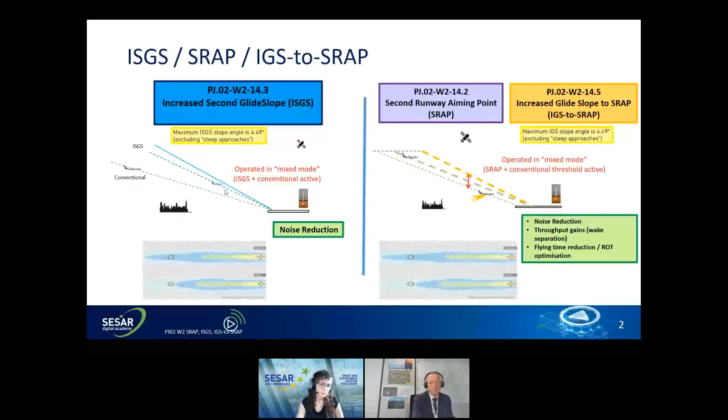And we could also combine the two, so the increased glide slope to the second runway aiming point. This is a third solution, which we call IGS to SRAP. The overall naming of these solutions is enhanced approach procedure. In fact, the work started earlier in SESAR, already in SESAR 1, through the EAP, enhanced approach procedure enabled by GBAS, and then further in SESAR 2020 in Wave 1, as well as continuation now in Wave 2.

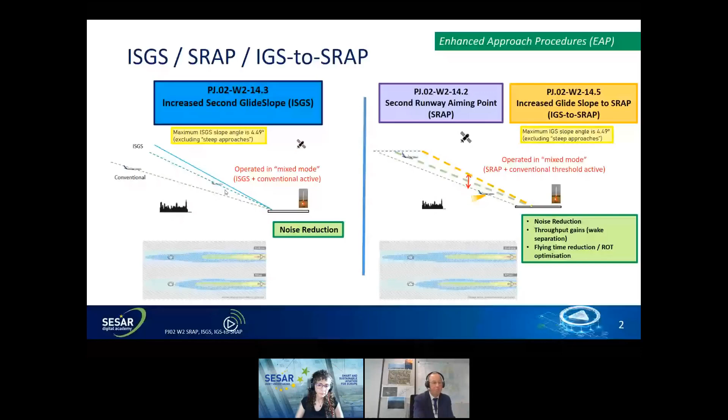So on the increased glide slope, second glide slope applicability, there is a key aspect to consider. If we have successive traffic flying on the steeper approach, in fact, we can apply standard separation even for wake turbulence. However, there is a situation where the number one traffic would be flying higher and number two on the conventional. And in that case, there can be a potential increased exposure, which would lead also, in some cases, depending on the combination of aircraft, to increased wake separation.

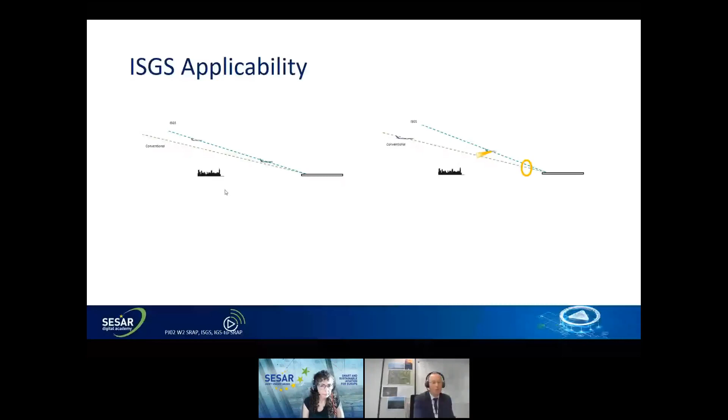Which means that, in this situation, the ISGS solution and operations are in fact compatible with limited traffic pressure, but we could also limit that impact through use of optimized wake turbulence separation schemes like RECAT. But that also means that overall, we expect this solution to be more applicable for lower traffic levels like off-peak or night situations, but it's also where we can expect the most constraint from the noise point of view.

If we look at the SRAP and IGS to SRAP, so with the double threshold, there is also a potential impact if number one traffic is above, but there is here as well a big benefit when we have smaller aircraft flying higher than larger aircraft, which would remain on conventional approach. And you can optimize the wake separation. It depends also on the distance between the two thresholds and the two aiming points, which also create the vertical distance between the glide slopes.

But there is a possibility, if we apply here in the example the wake RECAT scheme, to gain a further 1 or 2 miles in some cases, and even ultimately possible suspension of the additional wake separation. So the optimum working method here is to assign the smaller aircraft, medium and light, to the SRAP and to the upper glide. So here we can gain runway throughput benefits, arrival throughput.

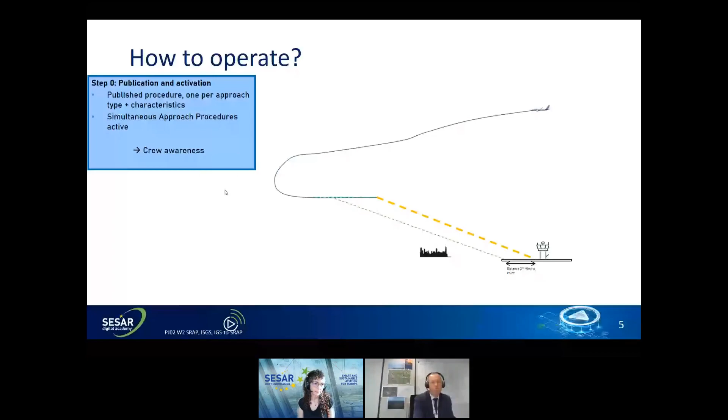And so, of course, the flight crew needs to be aware of the specific characteristics of the procedure, not only through the charts, but also through familiarization, through airport briefings, and possible simulation sessions. And then tactically, the approach procedures which are active would be mentioned and displayed by ATC, and the pilot can, from that, prepare and brief the most expected approach.

Then at initial contact with approach, they would be receiving the expected approach procedure, which can correspond to the approach they briefed, or otherwise they need to rebrief in case. And they can always reject if one of the procedures is not found suitable, given the specific conditions of the flight. There is a possibility to revert to conventional approach to a certain stage, but of course, this needs to be done early enough for the aircraft.

Your presentation has gone again, I think. That's strange because I can see it like before. So again, I'll try to. Reset, sorry. Can you see it now? Not yet. And actually, now we don't see you either. I don't know what happened. It's really strange. Okay, I'll do it again. I think there is indeed some jump.

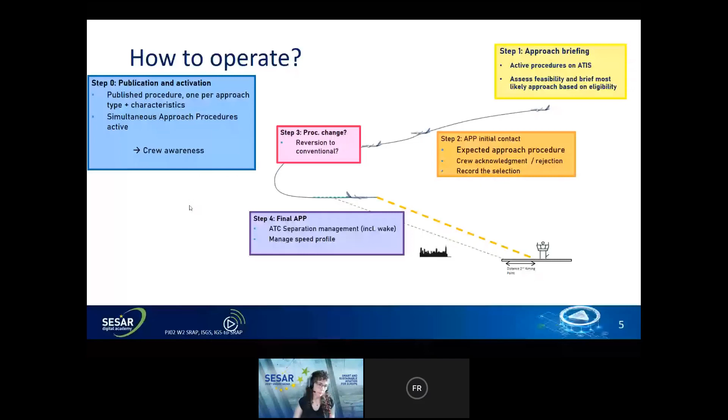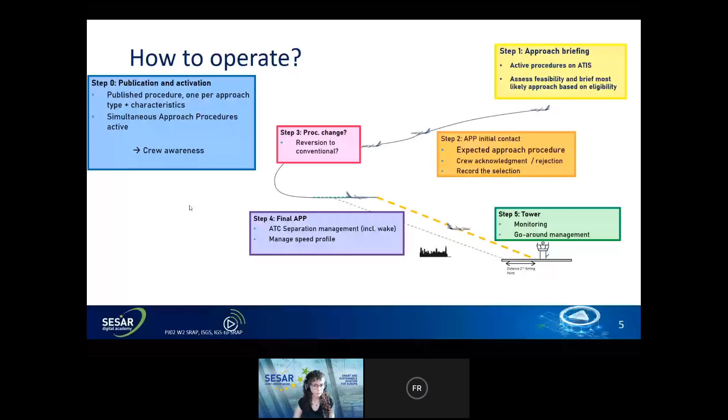Now it's back. Okay. So I was saying that there is possibility to revert to conventional approach at some stage, and eventually the final approach controller will manage the separation between the aircraft, also the speed profile aspect, because it may depend on the slope angle. And finally, the tower controller will ensure the monitoring of the traffic as they do, management of go-around, as well as specific reminder in the landing clearance about the intended threshold when applicable.

So to summarize, in terms of the key enablers, we have on the ATC operation side the need to be able to manage multiple active approach procedures, and there can be some HMI support for that. I will show examples, and the need to manage in particular the wake turbulence separation impact. On the airport infrastructure side, the adaptation of the visual aids, such as the slope indicator, the runway markings, or the approach lighting system. And on the flight operations aircraft side, it's published procedure. There is, of course, a key aspect on familiarization and the pilot cockpit assistance for possible increased slopes depending on the aircraft type. So let's have a look at the ATC side first.

Here is an illustration of adaptation of the controller HMI, which relies here on the use of another SESAR solution, which is time-based separation and optimum runway delivery tool, which provides the controller with spacing and separation indicators. And the flight labels of the traffic can be used to insert the assigned procedure such that the tool is aware of which profile and which separation applies.

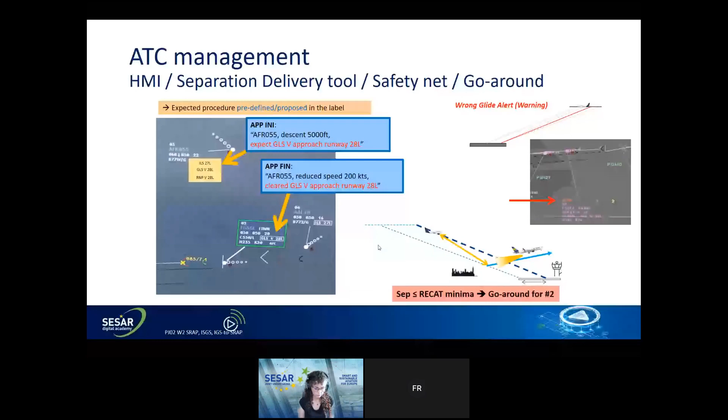There are also some specific safety nets that have been identified as necessary, because the reduction of wake separation relies on the fact that the aircraft will fly on different glide slopes and different vertical profiles, and in case there would be an interception of that profile, there is a need to warn the controller and to act directly. So there is what we call the wrong glide alert warning information. And on the go-around side, there is one specific situation where number one traffic flying on the lower glide would do a missed approach. Then we lose the criteria for reduction of wake separation, and so there is a need to manage go-around for the following traffic.

And so this has been evaluated through a series of real-time simulations with air traffic controllers. First in SESAR 2020 Wave 1, where there was an initial focus on the nominal case, on the controller HMI, and the use of this TBS ORD tool. And then in Wave 2, where we looked at non-nominal situations, such as the go-around, failure of the tool or the glide alert, and the way the controller can manage these situations, plus specific phraseology as I introduced before for the second threshold operation.

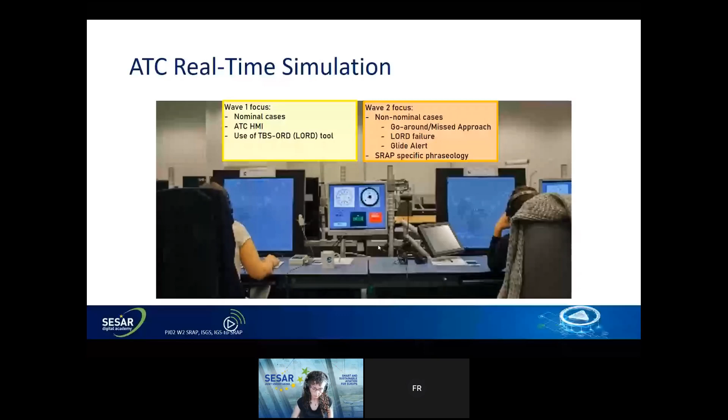So I now propose to have a look at what it will look like through our flight simulation campaign. We did a series of flight simulation campaigns with an Airbus 319 aircraft type with a qualified full flight simulator, and with type-rated pilots from airline operators. I now show you a first video which shows the approach with increased second glide slope, 3.5 degrees, with this 319 with the dual PAPI solution. And this is in day condition.

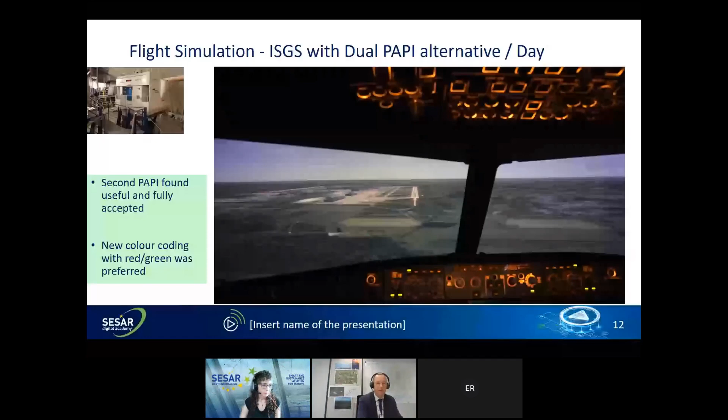Okay, so let's now look at basically the main conclusions from this. So from the pilot perspective, the second PAPI was found useful and accepted. And in fact, there was a slight preference for this new color coding with the red and the green for the second PAPI. So let's now go to the SRAP, second runway aiming point. First, let's look at the runway markings and how we can accommodate the second threshold aiming points and touchdown zone.

So in fact, there are two situations. Either we have the second threshold located more than 1,050 meters further. In that case, we can in fact duplicate the markings and avoid interference. So the first option was just to have a duplication of standard ICAO Annex 14 markings. Then we looked at a variant for the aiming point, which is using a checkered design. And in fact, this is inspired from what has been done at some airports, and it's still, I think, today the case in London City for the aiming point.

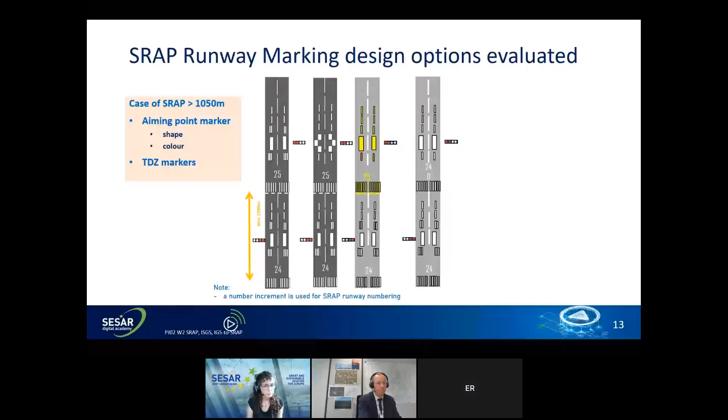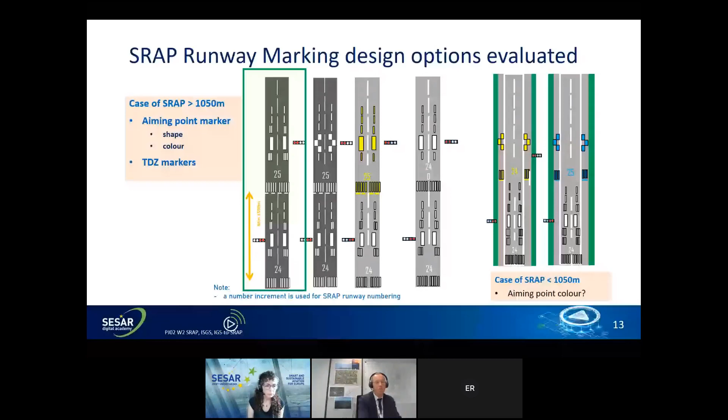We also looked at the possibility to use another color to increase the distinction, but however, this was also more challenging for the pilots, as I explained. And eventually, the possibility to use a letter for the second threshold instead of an increment. And also the case where we have less than 1,050 meters, using the side of the runway shoulders also with markings. So let's have a look at the next video, which is now looking back at the first option, which is the duplication of ICAO markings. And again, still the same airport environment.

400. Check. 300. 100 above. 200. Minimum. Continue. Check. 100. 50. 40. 30. 20. Retard. Retard. Retard. Spoilers. Reverse green. Checked.

Okay, so that was to assess the runway markings when landing on the second threshold. And from the pilot perspective, in fact, there was a preference to keep the white standard color for the markings, single stripe for the touchdown zone, and duplication of ICAO. And they were not found disturbing by the second markings, even landing on the first threshold.

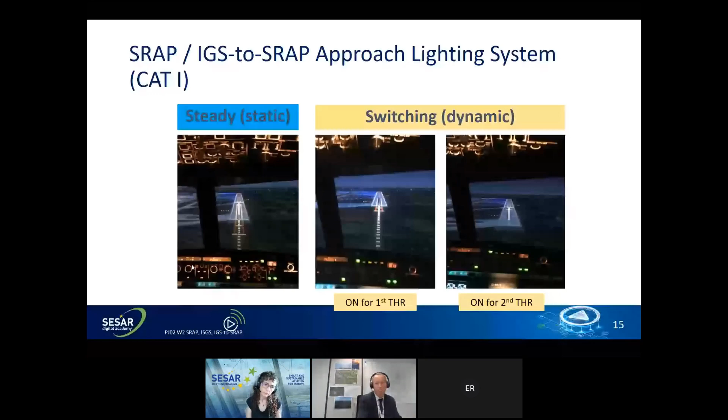And a second option would be to introduce a dynamic version, which would be switching. And so that would be only showing the approach lighting system for the next landing, depending on its intended threshold and aiming point. So either on the first threshold only or on the second threshold. So now we can look at another video again. So here we'll be landing on the second threshold, and this is the static version with the lighting on.

Okay, and so now let's look at the next one, which is looking at the dynamic version. So here we can see that we are in a sequence of arrivals, so in fact, our aircraft is assigned to the second threshold. However, in front, there is another traffic going to the first threshold, so on the lower glide. So in fact, we can first see the light for that traffic, and as soon as it is leaving the touchdown zone area, then the light will switch correctly to our approach. So let's have a look.

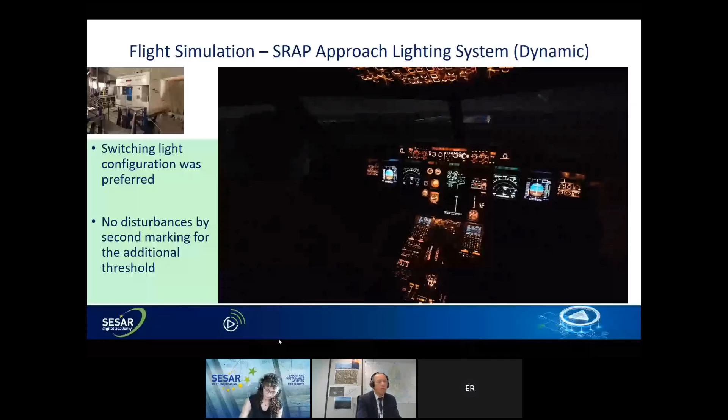So from this, we'd like to introduce now the ongoing activity as part of the VLD1 project DREAMS, which is the continuation of the work through a series of flight trials. So for the ISGS solution, increased second glide slope, there are two campaigns which are going to take place. One in Frankfurt with evaluation of GLS Cat 2 with a 3.2 slope. And then in Roma Ciampino, with the participation of Dassault and Honeywell in particular, with the Embraer 170 aircraft, evaluating 3.9 and 4.4 slopes on top of a baseline 3.5 approach, with RNP procedures.

And for the second runway aiming point, a first series of trials took place earlier this month at Twente in the east of the Netherlands, with the evaluation of the marking solution as well as GBAS, a GBAS ground station, and support of noise analysis. This was achieved with different aircraft platforms, the NLR test Cessna aircraft, as well as two operators, TUI and Lufthansa, with Boeing 737 and Airbus 319 aircraft.

So this is the setup that was implemented in Twente with the dual threshold, the markings and the second PAPI facing the eastern direction of the runway. And you can also see here the team involved from NLR and Eurocontrol. And now we can have a look at the final video, which is an approach to the second threshold at Twente, seen from the NLR aircraft.

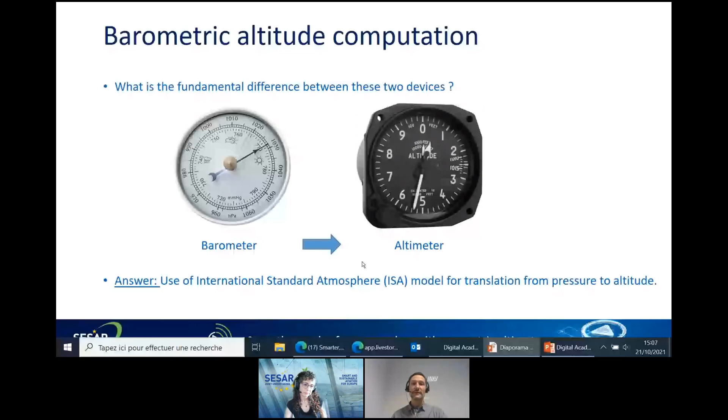But the exact relationship between the baro and the geometric altitude is never accurate, and it always depends on meteorological context. It could depend on the pressure and temperature at sea level, and also on the temperature profile. In some rare cases, for example, we can experience temperature inversion, which means that at higher altitude we will have warmer temperature than at a lower altitude, which is quite unusual, but can happen. So what you have to keep in mind is that without proper correction, an altimeter rarely provides the exact geometric altitude.

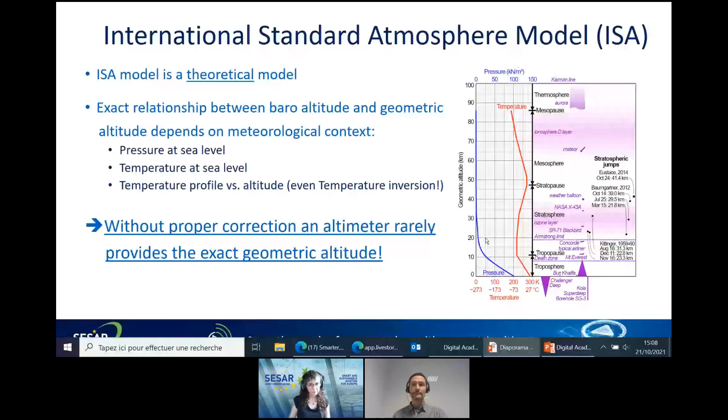So, how do we fly today? I guess all of you know there are two cases. Either we are far from the airport and we fly high enough, so all the aircraft share the same altitude setting, which means exactly the ISA model. So they assume the conditions are equivalent to the ISA model, and this is enough to maintain the vertical separation because all aircraft have the same reference altitude. Of course, it has nothing to do with the actual geometric altitude, but we don't mind.

However, when we are close to the ground, we need to stick to the geometric altitude to have obstacle clearances. So in this case, we add a barometric correction, which is named QNH, which is transmitted by ATC in order to correct the altitude setting.

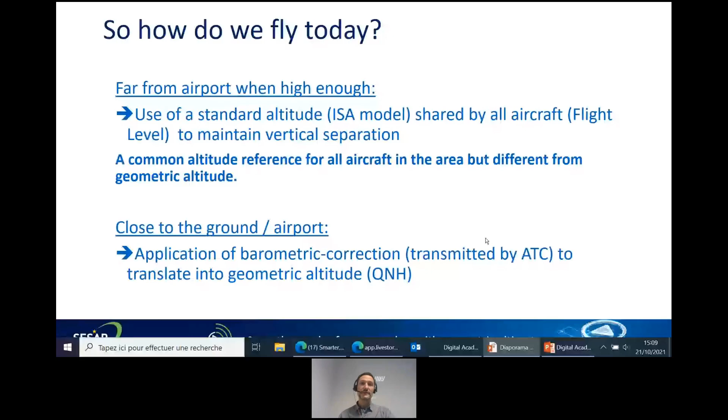Having a look at the impact of baro pressure and temperature on geometric altitude. Well, if you look at pressure variation, if local pressure is above the ISA model, then the real altitude will be above the barometric one. So here you can see that for the same altitude reading on the altimeter, you will have different actual altitude because of different pressure conditions. And this is corrected by this QNH compensation. So you use this knob here on the altimeter, and by looking in the window, you can just offset the altitude.

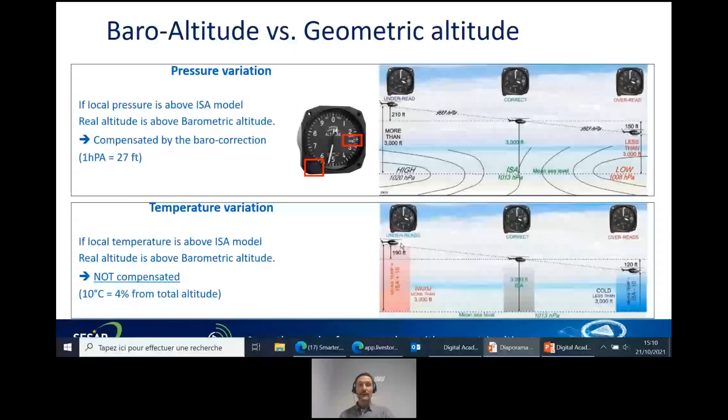We have actually the same issue with temperature variation. So if local temperature is above the ISA model, the real altitude will be above the barometric altitude. But you have to keep in mind that this is not compensated. So how do we do? How can we fly? It's because usually approach procedures account for this temperature error. They add margin, so down to or up to a certain temperature value, you are safe. You can just fly with your, let's say, wrong altitude. You're okay. So usually, in countries with mild climate, pilots are not used to compensating because they don't need to.

They are safe. But if you fly to northern countries in wintertime, then you will have to compensate if the ground temperature drops below some expected value. In this case, there are more or less two ways to compensate. Either the ATC just clears the aircraft at a higher than normal altitude, or, more commonly, it is done at aircraft level: the pilot offsets the published altitude to remain safe.

Well, how do we do that here? An example of an operational use is a landing in Scammon Bay in Alaska. And if we have a look at the FAA documentation, we see that there is a minimum temperature which is published. So I know that above this minimum temperature, above -21 degrees, I don't need to compensate. But if the temperature drops below, then we have to compensate. And here, with a different phase of flight, we have to compensate. So here, it's only in final approach.

Looking at the approach chart, we have a reminder of this minimum temperature here. And in the approach profile, we have here the different altitude constraints that we have to meet during the approach phase. This altitude constraint will have to be offset by this temperature compensation. There is an altitude constraint here, and there is also what we call decision altitude or minimum decision altitude, which is the altitude below which the crew is not supposed to continue the descent if they can't see the runway. So all these values have to be offset in order to remain safe. And this offset can be done either manually by the pilot or by the flight management system, by the avionics.

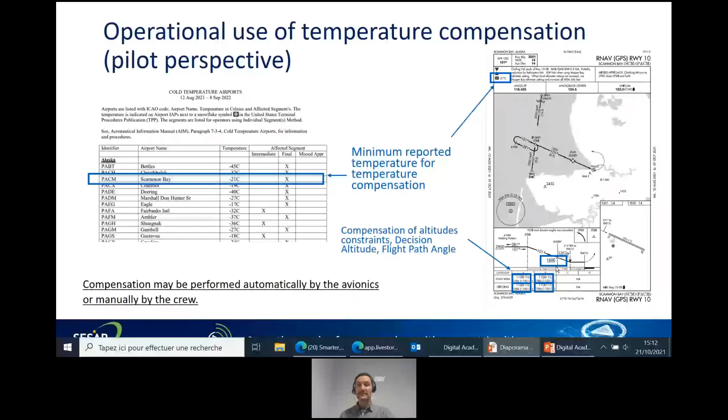Well, okay, so you could say we have a process, and so there is no issue, we can just compensate. Yes, that's true, and at the same time, there are some limitations and some drawbacks for the temperature compensation. Well, as you imagine, incorrect temperature information could lead to catastrophic consequences. So you have to be extremely careful when you input the temperature given by ATC. We also talked about temperature inversion. In this case, you have no way to know it, but what happens is that your flight path angle will become steeper than expected. And this is never a good idea, especially when you are close to the ground.

And in this case, you also have some additional workload for the crew. And in some cases, you do not have temperature information because there is no ATC at the airport you are going to. So the only solution is either to divert to another airport or to use a more conservative value. You can just use temperature information from the nearest airfield and add margins. But if you really want to remain safe, you have to add so much margin that in the end, you might just go around because you will not be able to see the runway in time.

Finally, in some cases, if you compensate the temperature in the intermediate phase, it means that you will offset your flight level or your altitude. And by offsetting this, you may, in some cases, disable some approach modes of the avionics. So this is a nightmare. Either you want to remain safe in the intermediate phase and you are not able to conduct the final approach phase, or if you want to conduct the final approach phase, you may not be safe during the intermediate phase. So all this leads to safety issues.

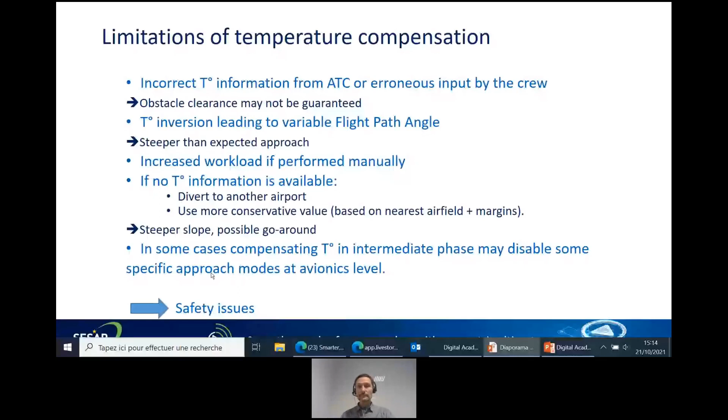Safety is one point. There is another point, which is the optimization of the flight profile. If we are looking at a traditional ILS glide intercept, usually it's performed from a constant altitude, and the glide will be intercepted from below. Any error on the baro altitude will just end in an uncertainty on the final approach point, which is the point where you are supposed to acquire the glide. So you will acquire it later or sooner, but anyway, you will still be on the glide. So you could say, well, okay, it's not a big deal. Yeah, you may be right. But let's have a look.

If we look now at an optimized descent, it means that you are not coming from a constant altitude. In this case, any error, especially in hot temperature cases, will make you arrive above the glide. Arriving from above the glide may have some drawbacks. If you want to get on the glide, you again have to have a steeper flight path angle, which is not a good idea. Another point is that some autopilots are not well designed to acquire the glide from above. So either they will need a really good stabilization phase, or sometimes they will never intercept the glide.

And anyway, you still have this stabilization phase that could be at least 2 nautical miles to be on the correct ILS. So now let's have a look. What can we do to get rid of temperature compensation? Because we see that it drives a lot of issues.

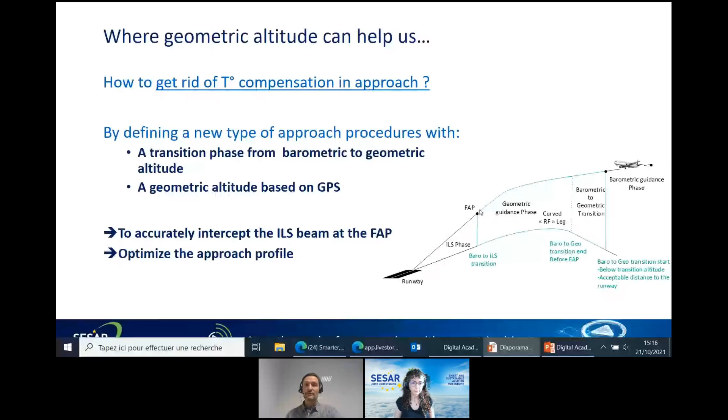And sometimes even if you're under the coverage, you do not have the expected performance to perform the approaches. This is for LPV; you do not have the expected availability, only, for example, 95% of the time. So this is something that has to be considered. And as you know also, jamming can still happen for GPS. So we have to find some, let's say, backup means.

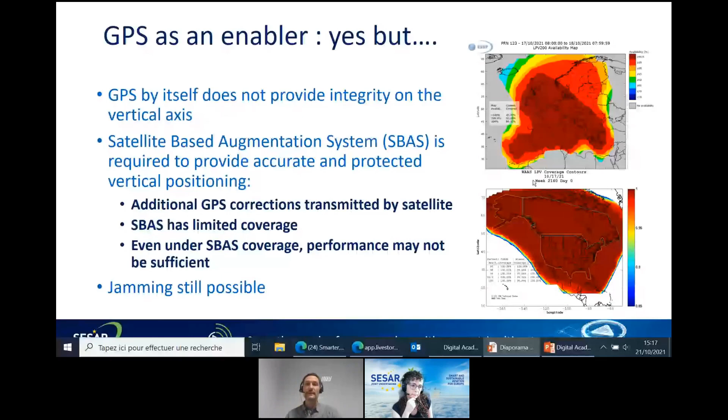Another thing is that the GPS provides altitude which is referenced to the ellipsoid. It's named WGS84, and it's just a simplified model of Earth, but which is different from the geoid reference or mean sea level reference that is used by the altimeter and by the procedures. So we have to add some kind of conversion from ellipsoid to geoid in order to use the GPS altitude directly inside the aircraft. This is named geoid undulation, and it can either be embedded in the avionics as a model, or this could be data available in the published procedure, as it is today for LPV procedures, for example.

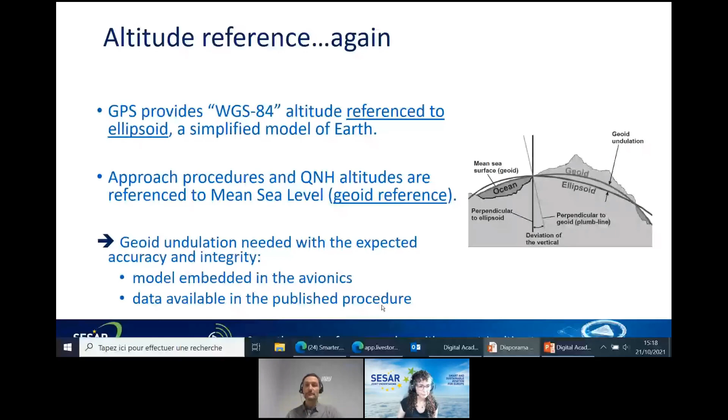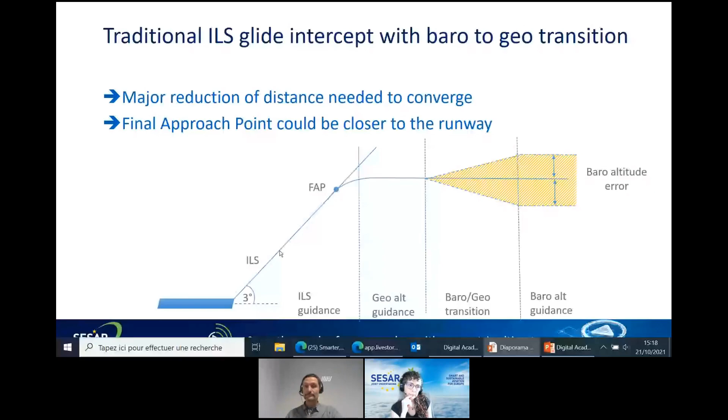Having a look back at our traditional glide intercept with this transition from barometric to geometric, we have here this additional phase, and we are sure that when we arrive on the final approach point, we are exactly where we expect to. So it means that this final approach point could be actually closer to the runway. This is also true when we talk about the optimized descent. Here we will have our convergence phase, and here still arriving at the final approach point, which could be much closer to the runway. And we have just removed all our issues of safety, of acquisition from above, and so on.

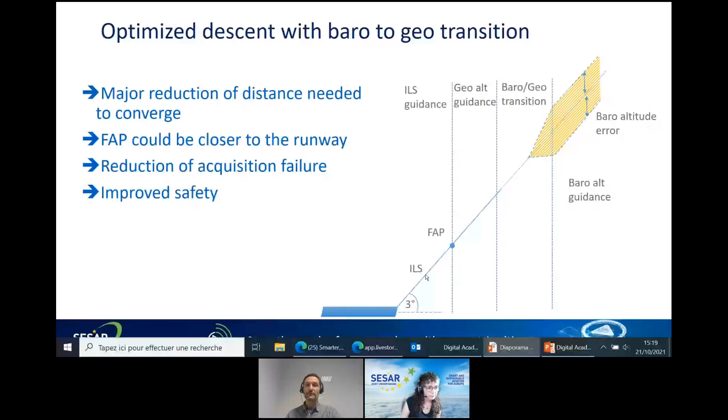Now let's have a look. How can we optimize the lateral profile? Imagine we have this current procedure, some kind of no-fly zone, you are not supposed to fly over. And due to the stabilization on the glide, you have this extra margin here on the final approach point. So the only way to perform this approach is to go on the right here at this barometric guidance, acquire the ILS here, and end on the runway.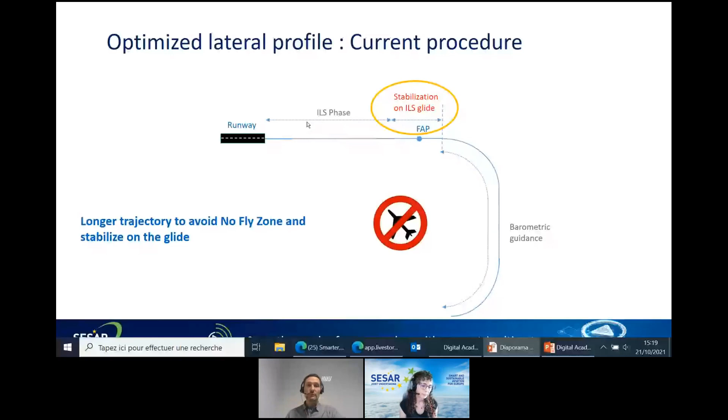Now, what we plan to propose and to test is this new procedure. We still have the barometric guidance, but we introduce this transition from barometric to geometric here. And since we are geometric, we can arrive on the ILS beam much later and have the final approach point much closer to the runway. So you can see that we have reduced the number of track miles because we could not go on this part. We just went on the left part of the no-fly zone.

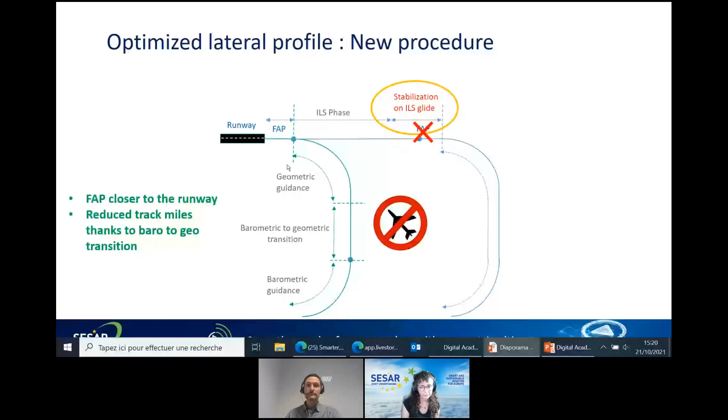An additional point is that you could also additionally optimize the vertical path by extending the 3-degree glide path through the curved segment here, because you have 3 degrees here, but since you are already in geometric in this case, you can just have 3 degrees as well. It will have a more stable and deterministic vertical path.

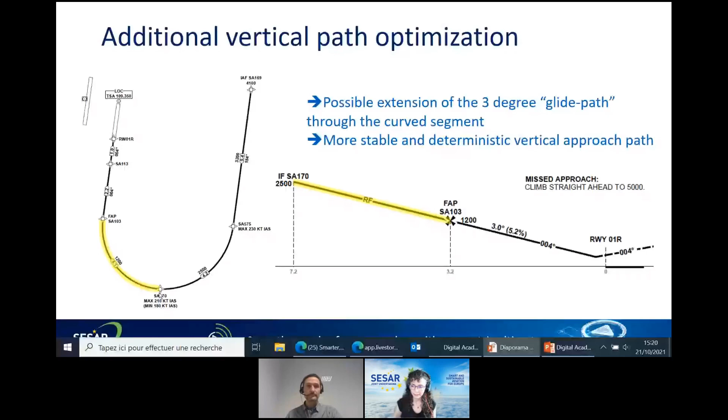Of course, everything is nice, but life is never perfect, so there are still a couple of challenges at ATC level. ATC will have to manage a mix of barometric and geometric reference traffic. This is quite unusual, so we have to look at it with extreme care. The instructions that could be transmitted by ATC, for example, level off, go around, anything like that should still remain in baro. So sometimes you have a transition back from geo to baro, and this is also to be studied.

Of course, we need, or ATC need to guarantee that the actual vertical paths adhere to altitude constraints. And this drives a question: does the aircraft geometric altitude have to be sent at ground level? Today, only barometric information is transmitted to ATC. Do we need to also transmit geometric altitude that in some cases is already available, for example, in ADS-B? That's a question we have to discuss.

Also challenges, for example, when you are designing the procedure, you have this vertical constraint here, and the pilot has to check that he is at the correct altitude, or at least above these altitudes. But here, we are in barometric. We have not started the transition phase yet. And here, when geometric, the transition is there. So how do we indicate to the pilot that this is geometric and that is barometric? We have to look at it more carefully.

Of course, the avionics has to provide a smooth, accurate, and safe transition, that's for sure. And the pilot has also to change its mindset because everything in the cockpit is referenced to baro. So if suddenly we just change to geo, we have to make sure that the pilot is aware of that and there is no ambiguity about the cockpit information.

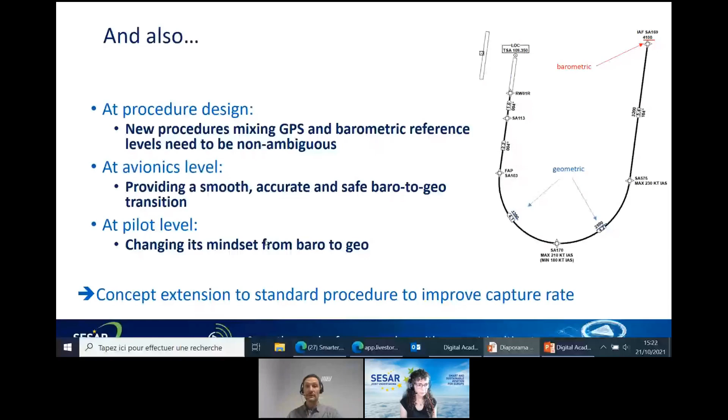And finally, we could extend this concept not on new procedures, but on existing procedures. It would only improve the capture rate, probably not optimize the profile, but it could be interesting anyway. So that's more or less what I wanted to say to you.

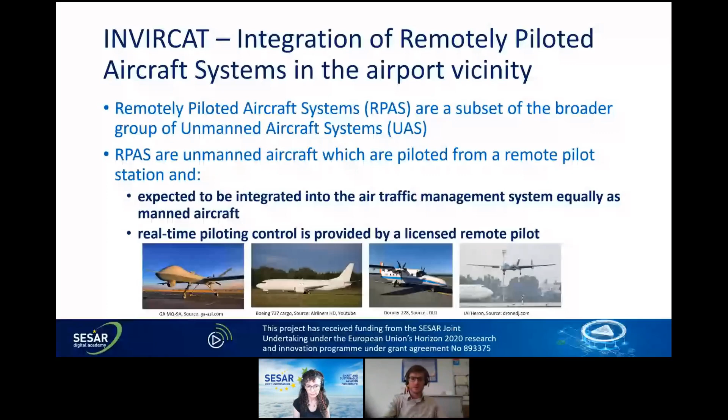Yeah, I lost focus, sorry. Off my mouse.

Why do we have to do that? So why should RPAS be included in the arrival stream at all? Why don't we just go along with the current procedures, blocking airspaces and airfields and operating RPAS from there? As you might see in the surroundings, civil application of RPAS in particular, and also drones in the broader sense of urban air mobility, for example, is growing. So we expect to have a growing market of drones and RPAS in the airport infrastructure as well. One potential use case, as I said, with the Boeing 737, is assumed cargo transport that can be enabled to be unmanned, which is an imaginable use case in the future.

We have crisis response and search and rescue activities, for example, that can then be operated from a regular airfield. You could imagine enabling communication infrastructure in remote areas and deploying multiple RPAS. Monitoring of infrastructure is one thing, also infrastructure on or in the airport vicinity, runway inspection and border inspection, railways, for example. Atmospheric research would be another one. So the use cases are broad, and the market is growing, so integration is required at some point in time. And as I said, you could take dedicated airfields or blocked airspace, but that is not always practical.

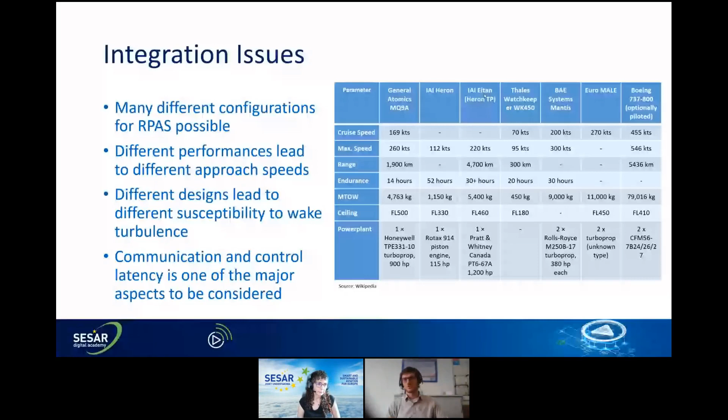Some more operational challenges, not yet finished. We researched nominal and non-nominal operation aspects, what can happen in RPAS operations and what is a new addition when you operate RPAS. So even in nominal operations, you have challenges by increased workload due to some latency on both sides, remote pilot and ATC. As I said before, you lose some situational awareness because you're not in the aircraft, you cannot feel the aircraft.

A part of that is the fact that in our concept of operations, we said you shouldn't use visual aids for your control of the RPA during the landing phase. Because due to latency, you could give the wrong input to the system, and then you have pilot-induced oscillation, and your arrival is not smooth anymore and not safe. So you shouldn't rely on that. That's why we think an automatic takeoff and landing system should be in place. As I said also before, reduced airspace capacity can be expected.

In non-nominal operations, we have additional factors that come into play when you operate RPAS. For example, C2 link failure, that is an unmanned, let's say, aspect, and ATOL failure that you can see under that, so automatic takeoff and landing system. If that fails, or if a subsystem fails, what then?

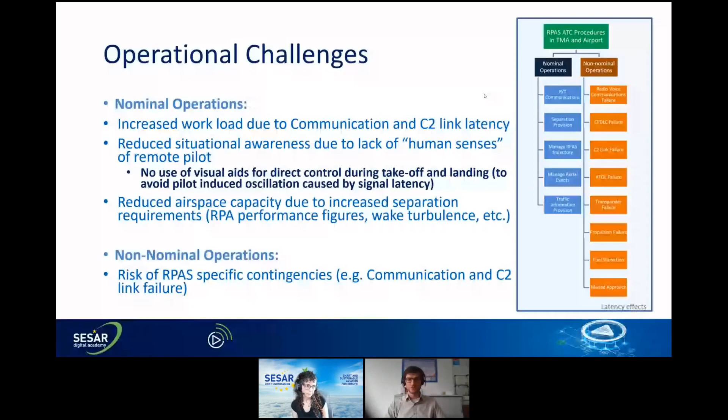Again, a step back towards the scope of our project. Our aim is to develop a concept of operations, abbreviated to CONOPS, to integrate those RPAS into existing ATM environment and infrastructures within the TMA and airports under instrument flight rules. We focus on the marked flight phases, so taxiing from your parking position to the runway, and then departure via standard instrument departure. We leave out the en route sector because we think it's least critical, at least in our scope. And then the approach and arrival phase to a safe landing and taxiing back to your parking position.

We have a special focus also set on the impact of latency. As you saw, the numbers can be quite high. So what is the impact of that latency? What is required for an automatic takeoff and landing system, and how can and should that be operated? How can you realize a handover between remote pilot stations? Because you can ensure a safer arrival and landing phase if you have the control handed over to a distinct remote pilot station in the airport vicinity. I will come back to that later. And we look at airspace classes A, B, and C in IFR, as I said.

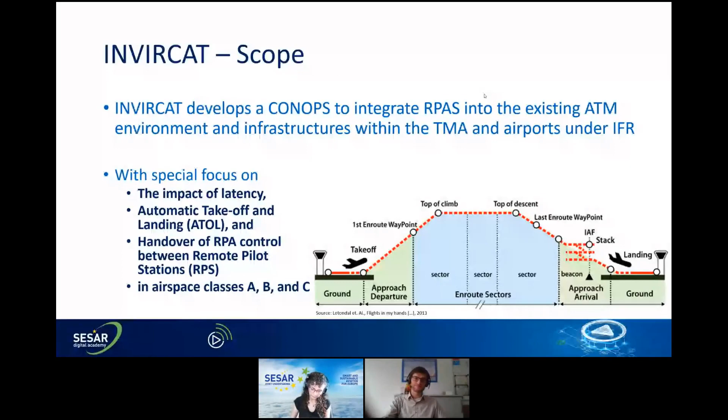We had to take some assumptions, and we started with Eurocontrol's RPAS traffic class 6. I will not read everything out loud, but it's based on EASA's certified category, as opposed to open and specific, so certified operations under instrument flight rules. And you have to meet some performance requirements in the network, TMA and airport. You have to be capable of flying SIDs and STARs.

You have to be able to meet communication, navigation, and surveillance airspace requirements. There needs to be two-way communication with ATC in place. You have to be able to contact ATC if your link is lost to your RPA, if you have an emergency situation, or as a final resort, controlled termination of flight.

You have to have detect and avoid equipment on board compatible with ACAS, and a flight plan needs to be attached to that operation, including type of RPAS, your planned contingency procedures if anything goes wrong, and a contact phone number, backup landline phone number to the remote pilot.

And that's not all. So we found some more assumptions we have to take. We assume the RPA to be of a fixed wing structure. We don't really exclude rotary winged aircraft; if they can fly the SIDs and STARs and if they are able to meet the requirements, feel free to use them. But usually they have different procedures, so fixed wing structure is an assumption at least. They have to be certified adequately. They have to have a command and control link.

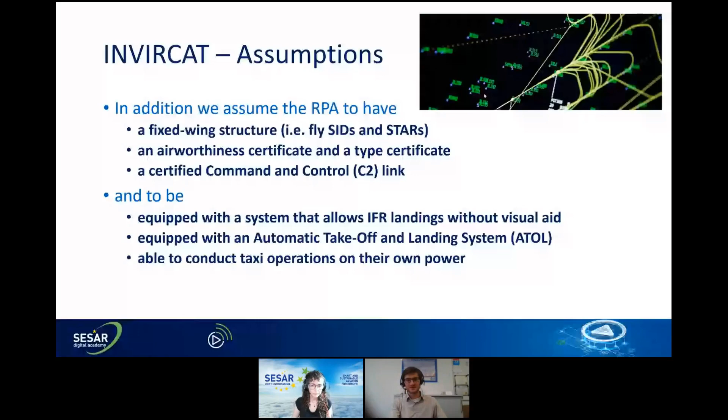Some preliminary findings. We are halfway through the project, and we will have simulations in November, and we will have a second iteration of our concept of operations and our requirements. But we have some preliminary findings already. Regarding the handover, as I said, we think it is likely that a handover to a distinct remote pilot station in the airport vicinity will happen.

You do have the problem of latency when you have a bigger flight and you have to rely on satellite communication in the en route phase. You would want to switch back to radio line of sight or even ground communication with ATC in order to have a safe operation in the airport vicinity. We realized there are some system requirements with that and some operational requirements. So the remote pilot stations must be active, the C2 link must be compatible, and you have to have voice communication between the remote pilot stations.

And then for the actual handover, you have to take into account the status of the RPAS, the location, any changes to the RPA or the flight plan. If you have any ATC instructions that are still pending while you're doing the switching, they should not get lost. For the coordination with ATC, a backup number, as I said before, landline connection, should also be in place, either direct or through some center.

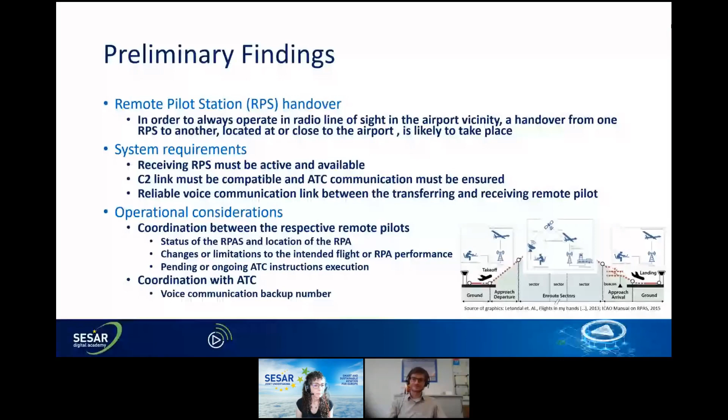Then we have a big set of requirements, almost 100 preliminary requirements divided into operational and functional parts, derived from our initial concept of operations. You see some examples here for ATC, and for the handover procedure they are numerous. We tried not to repeat everything that stems from manned aviation. So we say, if it's possible, please stick to manned aviation requirements. But there still are many additional ones that we stumbled upon.

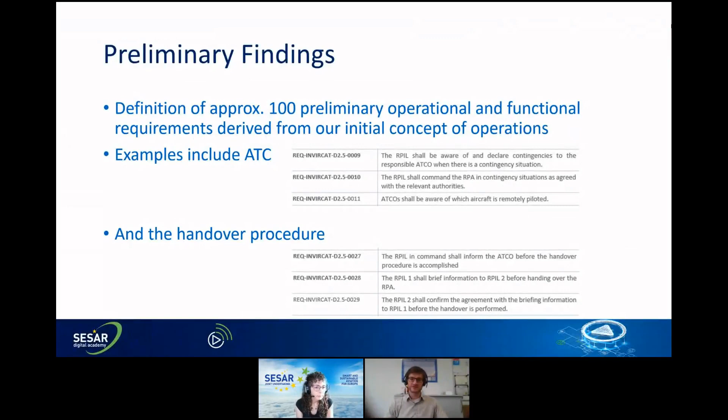And our initial ConOps and the initial set of requirements will be validated in the real-time simulations upcoming in November. We couldn't do everything that we identified, so we had to focus on the most crucial parts. Topmost is impact of latency on air traffic control and the remote pilot. We look at nominal conditions, and then at communication link failure, transponder failure, how ATC reacts to that, and what if the RPA needs to perform a traffic avoidance maneuver in a traffic conflict situation, again with latency attached to that.

Then we have a closer look at the arrival and landing phase with an automatic takeoff and landing system. We first will look at nominal conditions. Then what happens if an ATOL subsystem fails? They are failure safe, but there can be ATOL occurrences, that's how they are called. And if a subsystem fails, what can we do then?

What if there is a conflict on the runway, an incursion, and you have to perform a go-around or missed approach with latency to the command, and what happens if your C2 link fails? And then we look at multiple RPAS at the same time in the approach phase, first in nominal conditions, and then what happens in an assumed case where the C2 link fails for all of them for some reason, attack or infrastructure breakdown.

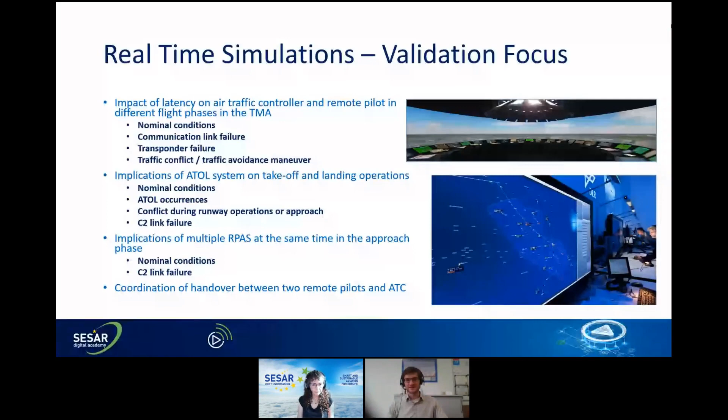And that's about it. As I said, we are halfway through, so you can find our first set of documentation, the public deliverables on initial concept of operations, on use cases, and on state of the art